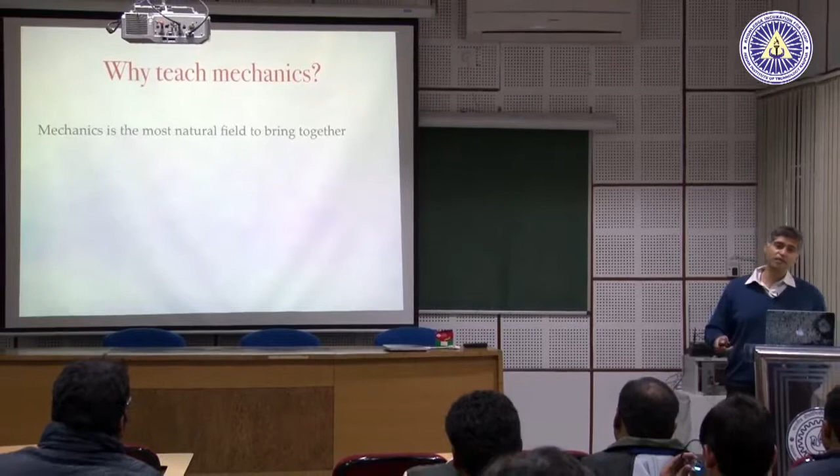So I will broaden the question and I will ask, why teach mechanics? Dynamics is a subset of the broad field of mechanics. So why teach mechanics? It is the most natural field to bring together the 4 or 5 elements that constitute any scientific or technological inquiry. What are the 4 or 5 elements? Mathematical modeling and techniques. What does that mean? That means that you see something happening, it is too complex, so you make a mathematical model

out of it. So the computer scientists amongst you can imagine that you see people wanting to meet or not wanting to meet, or wanting to chat or not wanting to chat, and you abstract it and make a mathematical model which is called Facebook. It is basically a program which is executing commands following an algorithm. It is a mathematical model. How do you solve a mathematical model? By techniques.

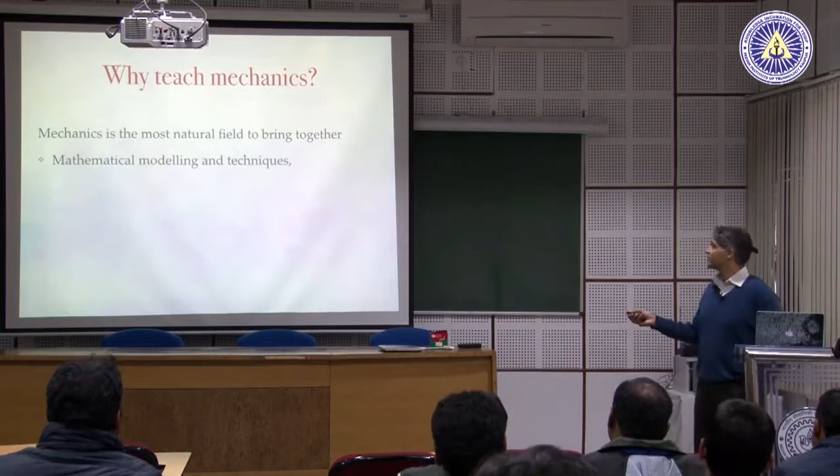It is the first instance of our trying to understand natural laws of physics before electricity. This was it. It can often be demonstrated with simple experiments, and it matches intuition and experience. ये तो होना ही था. If you drop an apple, it has to fall down. That is my experience, right? But it can explain intuition and experience, it can also defy them. So that is why it is most important. This is the first time that you go through these processes together.

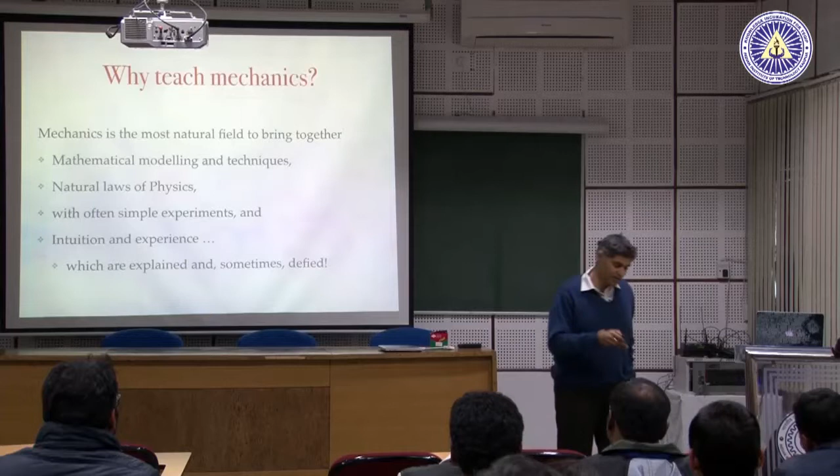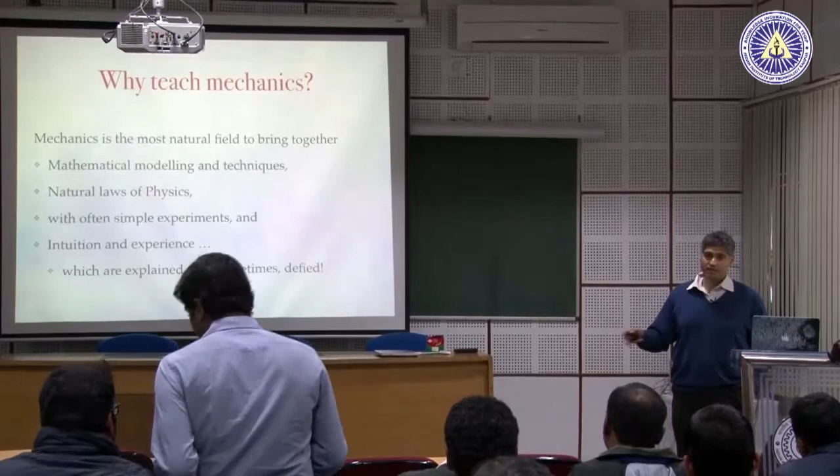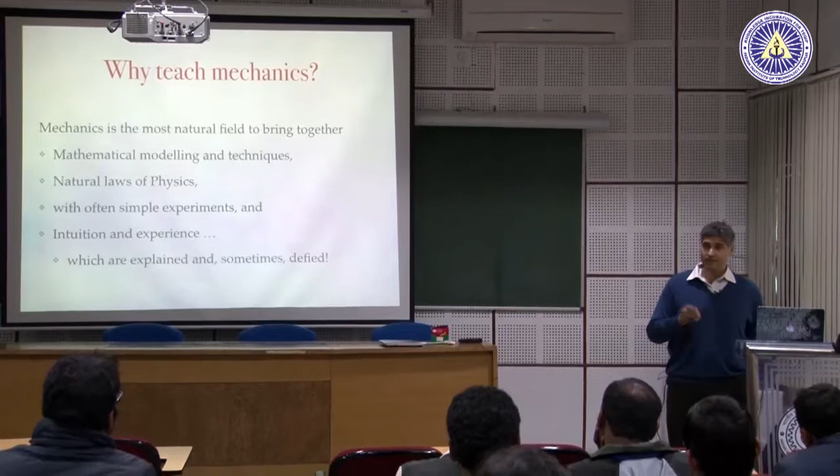So even if you are not going to do mechanical engineering, when I was a student at IIT Kanpur a long time ago, dynamics was compulsory to all branches, not just mechanical engineers. There is a story in which some physics people said, we do not need to teach this, we want to study atoms, and anyway this is easy. So they were told, fine, if it is easy, here is a question paper, please solve it. If you can, we will not make it compulsory. They were unable to solve it. This is a true story. That is why until recently dynamics was compulsory for all possible students.

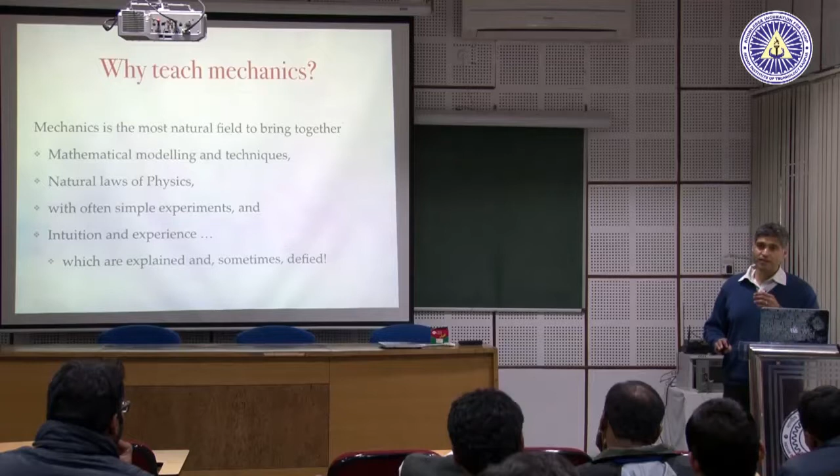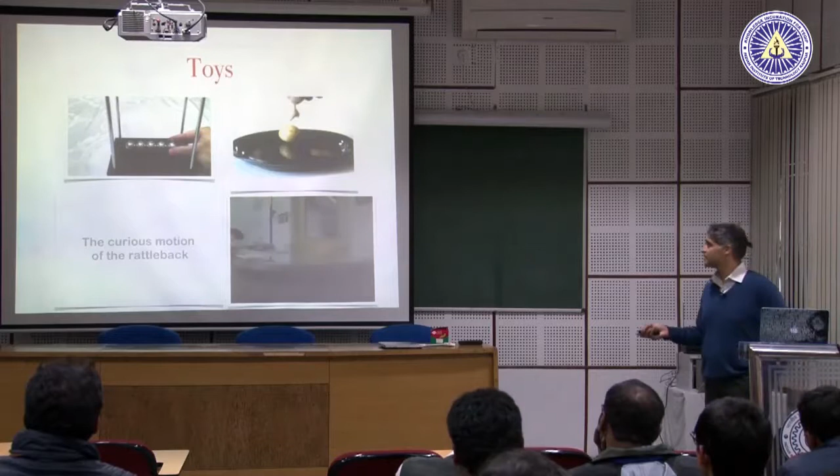So I encourage even those amongst you who are not mechanical engineers to believe me when I say dynamics is the most accessible way to understand the methods of scientific inquiry. Then again, it is fun to teach and it is fun to see. So why is that? I will show you 4 videos which will play simultaneously, and you can look at them for about a minute and decide if they are kind of fun or not.

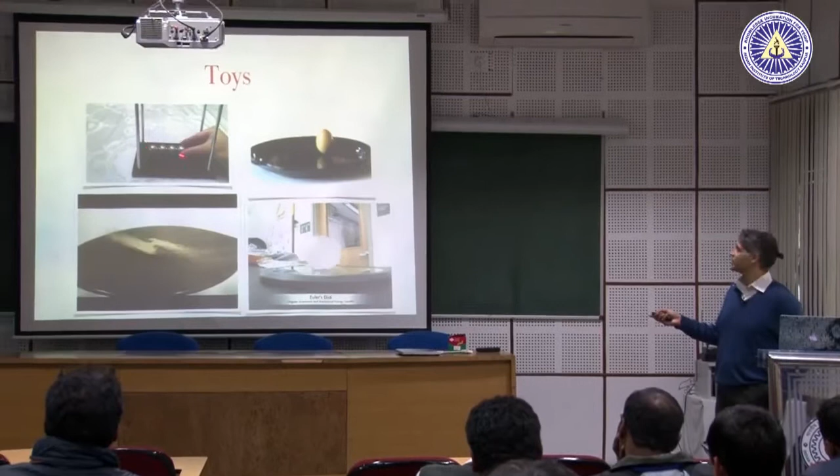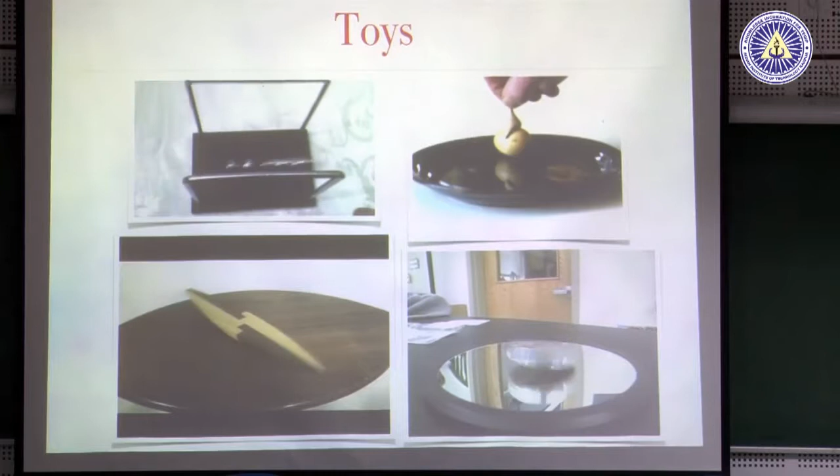So you see a pendulum, but not just one, many of them, and that is interesting. Now this video, let us wait for it to stop, and then this one. What you see is a disc which is falling. You can see it in a kitchen where a plate falls. Now many of you will often have seen something called 1 by 0. What is it called? It is also called a singularity. When things go bad, they go bad through singularities. This disc, what you are seeing right now, is the approach to a singularity.

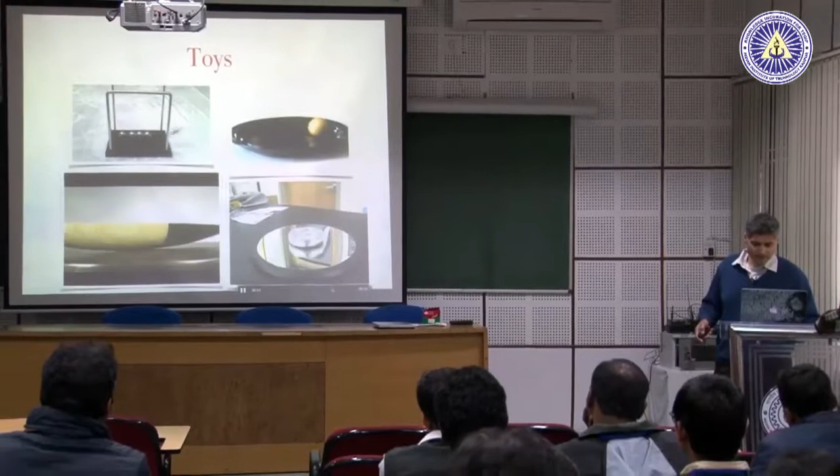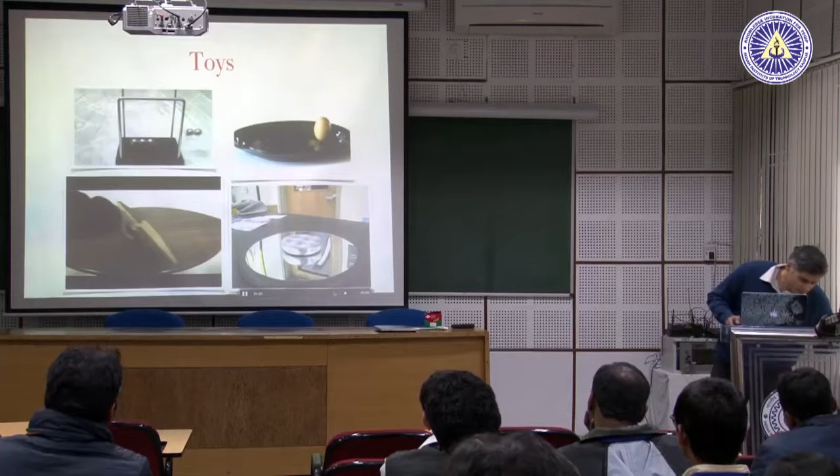And I do not know if this has volume or not. Let us see. Yeah, I think you can. So let me try this again. I am going to make you hear a singularity. Can you hear it? Could you hear it? Let's try again. That one I don't want. I want this one. Can you hear it? I don't know if you can.

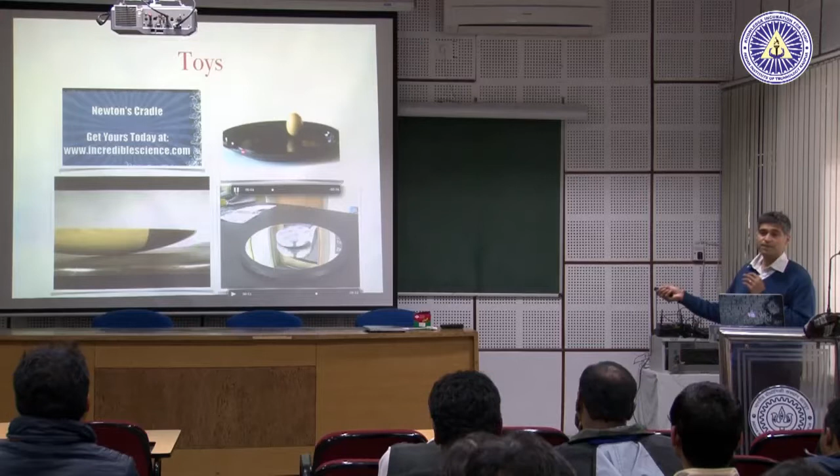So as it falls, if you remain really quiet, maybe you can pick up something. So he spins this egg, which is already spinning the wrong way. I wanted to spin from this point. Okay, so it stands up. Okay, so he's going to start spinning this, and it stands up. Why should that surprise you? Okay, it should surprise you if you have done dynamics.

What is very interesting is that it is spinning about a long axis. Okay, rocket engineers discovered very soon, and I will show you later, that this axis of spin is unstable, that is stable, but the body chose to go from stable to unstable. Okay, so it makes it interesting because it seems to be defying laws of physics.

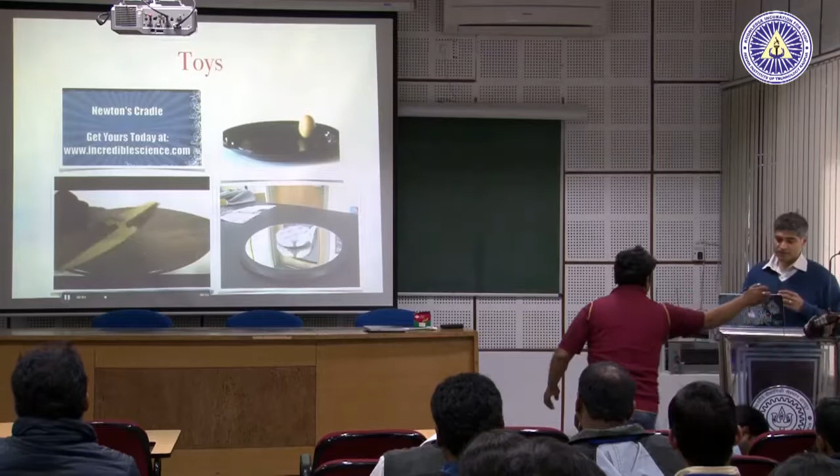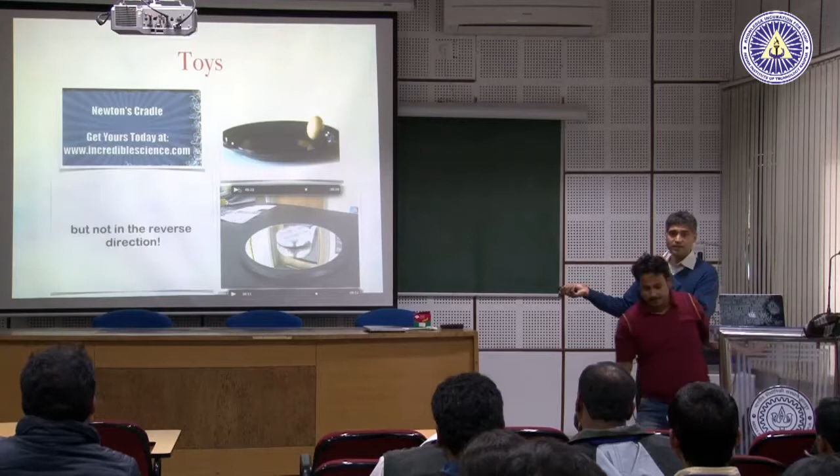Similarly, this one, let's see if we can. So he is going to spin this object. Forget this video. So he is going to spin this. It spins very nicely. There is no problem in this one. Okay. But if you try to spin it the other way, it's not going to spin. In fact, it's going to reverse direction. Okay.

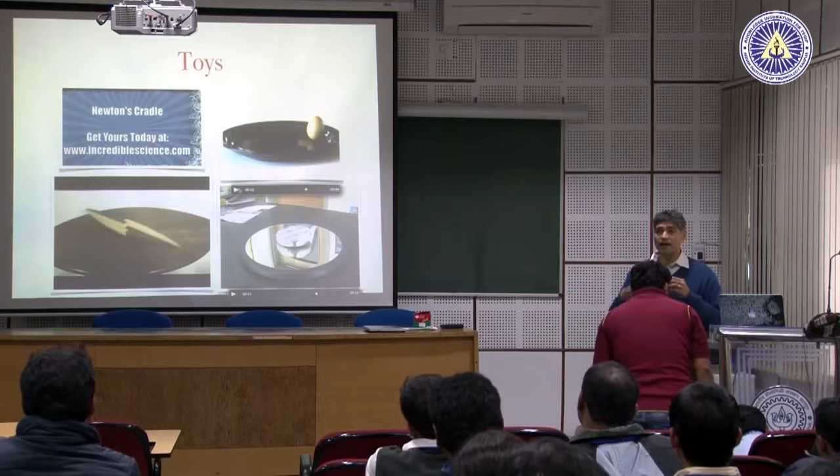And nobody created it. This one is created. I once fell into a river, and when I came out, I had one such stone which behaved like this. So it's actually a very old toy. Okay. So in rivers, the stones sometimes behave in this way. They would spin in one direction but not the other direction.

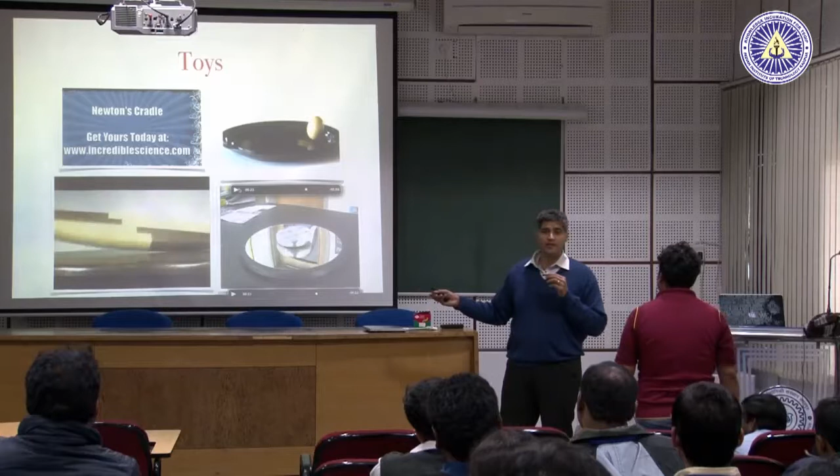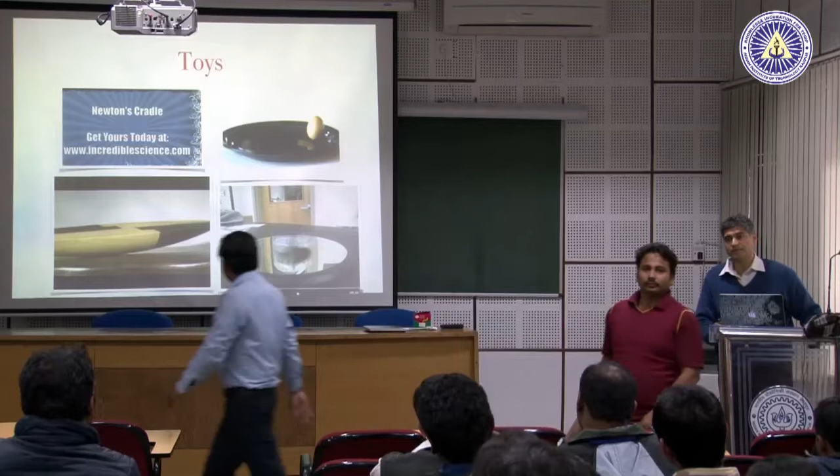Okay, now you hear this sound. Normal sound, nothing very special. It's becoming faster. Okay, what you heard was a mathematical singularity. If you were to actually write down the equations of motion and solve it, you would see something blowing up. So what do you think? What was blowing up? It was spinning very fast.

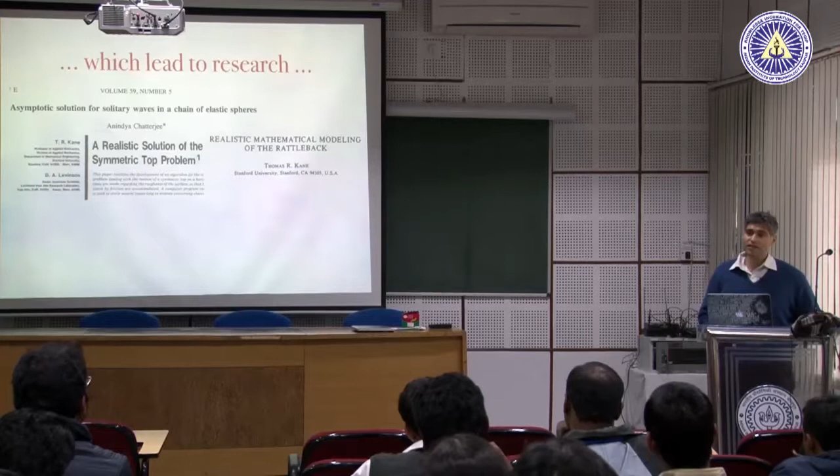I mean, if you look at it this time, if you look at the lines, they are actually going very slowly. It is not spinning very fast, but the contact point is moving exceedingly fast. How fast? It approached infinity. It's faster than light. I just showed you something moving faster than light.

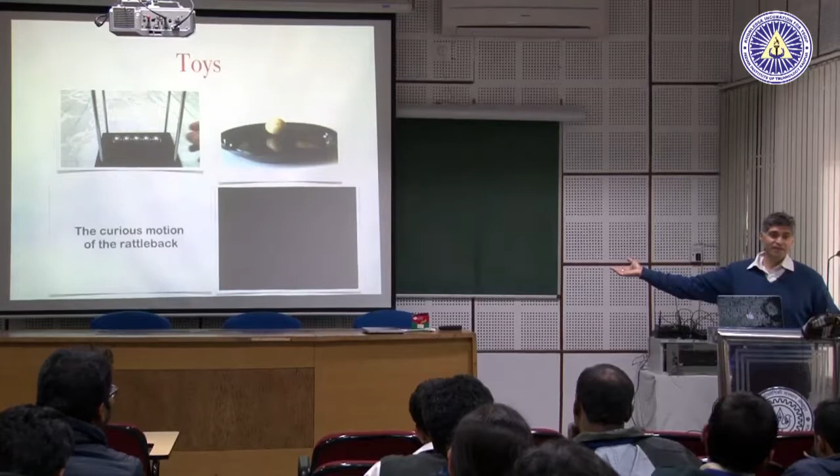You just learned that nothing can move faster than light. But I have done a simple tabletop dynamics experiment and made you hear something moving faster than light. I will let you figure out why Einstein is right and this is right. I will leave it for you. Okay. So anyway, the point is, all of these questions look very simple. You can buy them in toy shops. You will see them on the tables of bosses, and they all lead, so we can get rid of the sound, they lead to research. So here are 3 papers.

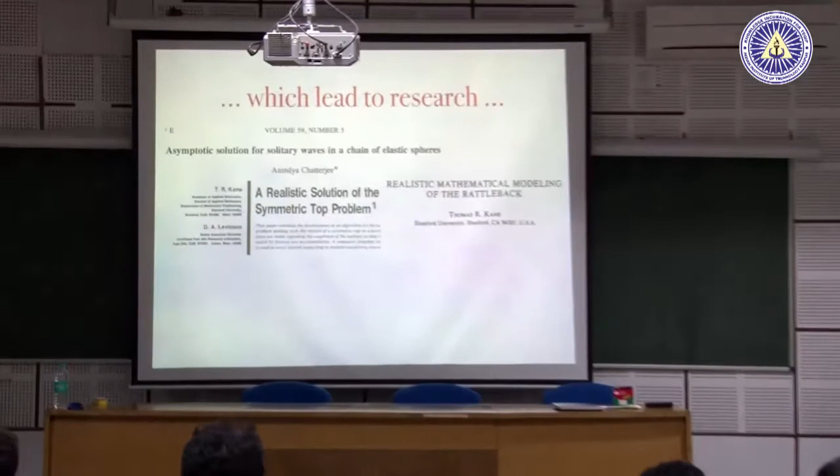You saw this, the thing which spins in one direction but not the other. Paper by Kane from Stanford University. The egg or the ellipsoid which stood up. Paper again by Kane from Stanford. Pendulum, the many pendula which were hitting each other. Paper by Anindya Chatterjee, who will talk to some of us tomorrow. Okay, and they all got the dynamics right, and here is someone who didn't.

That's a paper on the Euler disk with wrong dynamics, but published in, I will let you guess, published in Nature, and it's wrong. Okay, I mean, it's demonstrably wrong, but published there, wrong dynamics. So, you can get dynamics right and get published, you can get dynamics wrong and get published, it's win-win.

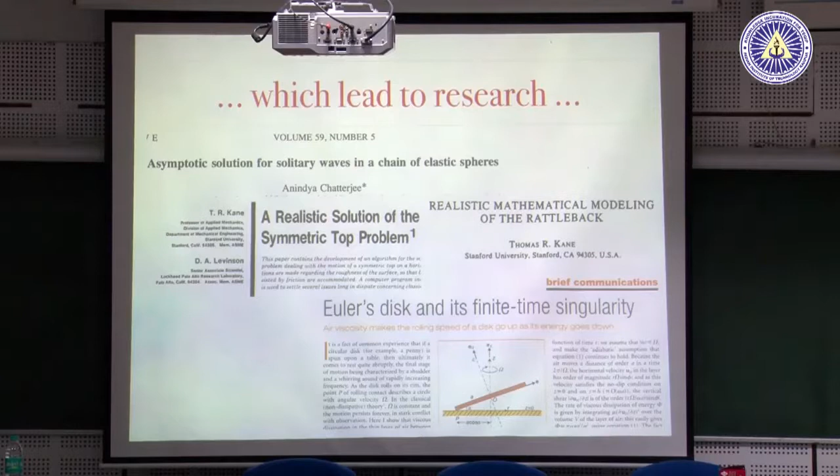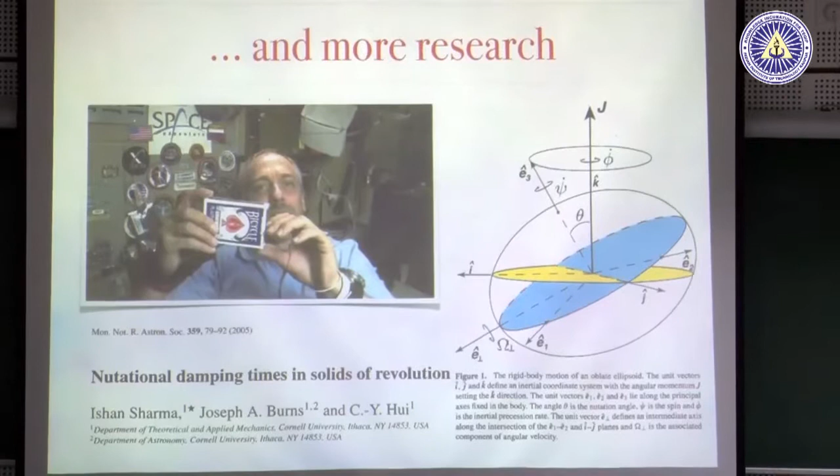So, out of 3 axes, 1 is smallest, 1 is largest, the middle one is always unstable, and this is very important. Well, for me it was important, it got me my first publication. Okay, just this idea. It is also useful. It is useful because it is used in cars. Okay, let us see if this video is running a little slowly.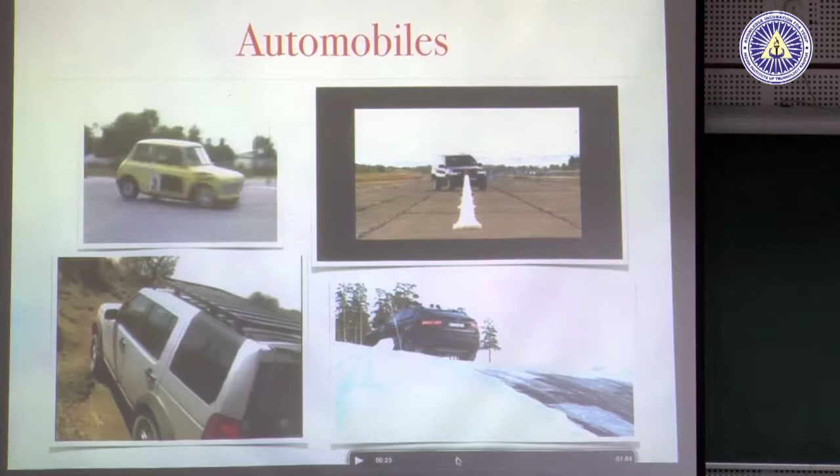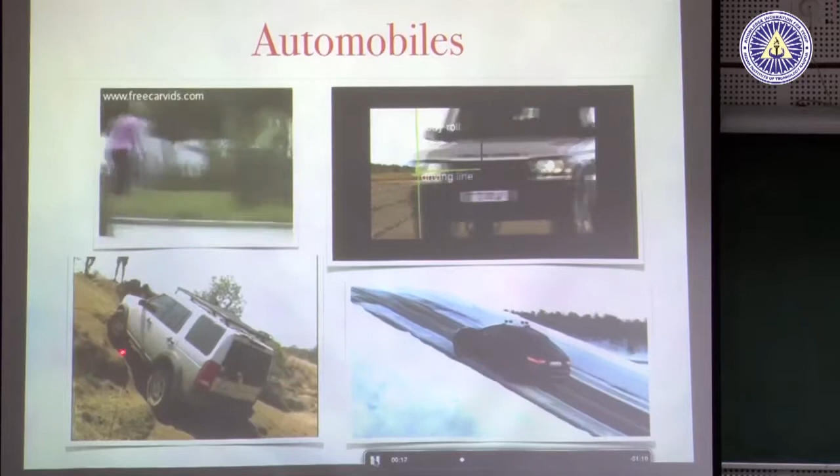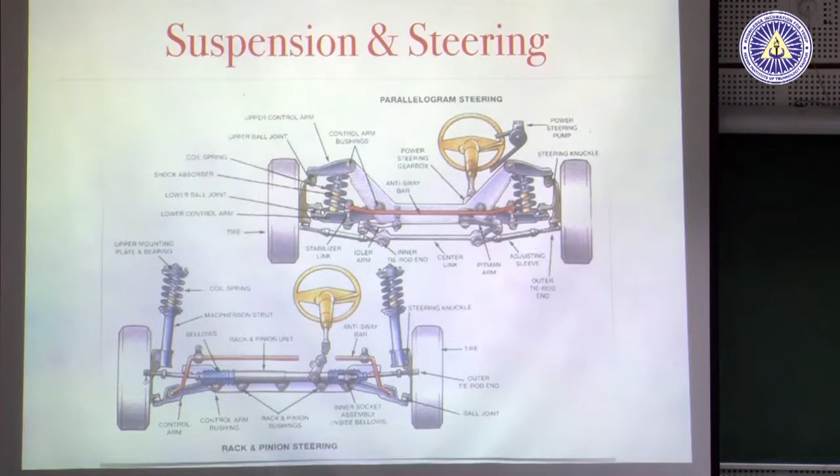So, what you see are cars doing very complicated motions. This car is doing complicated motion, this car is trying to not slip down, this is trying to climb a hill. This is the test done on automobiles. Cars are very complicated machinery. That is a typical diagram of steering and suspension mechanism. How will I solve it? I will show you towards the end.

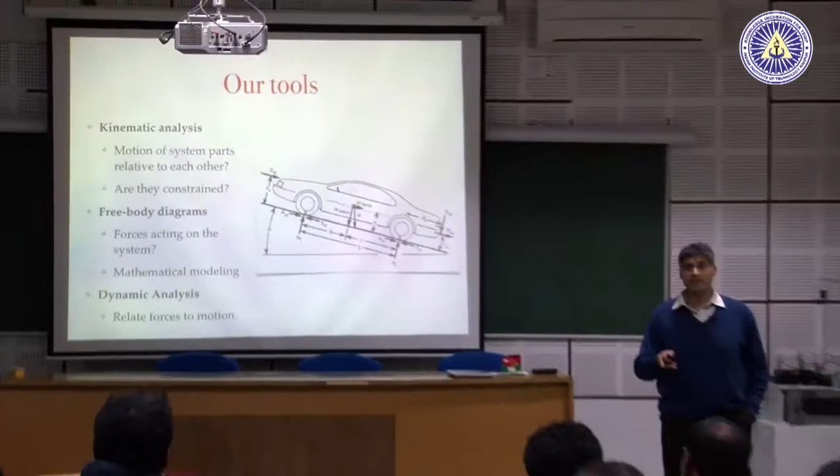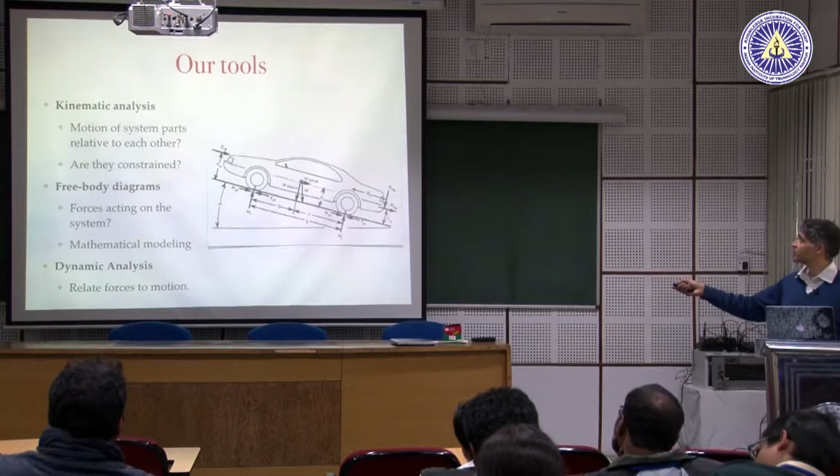Many of these questions can be answered by second year undergraduate dynamics courses. All those papers I showed you were based on second year dynamics, not more. Okay. So, what are our tools? We do kinematics, how objects relate to objects geometrically. We draw free body diagrams to isolate the forces acting on the object. We do dynamics to relate forces to motion. This is where laws of physics come in.

You can experience a force, you can't see an electric current. Okay. That is why it is accessible. If I tell you that a capacitance can store energy, you can't imagine it, but you can imagine a spring storing energy. That is why it is accessible.

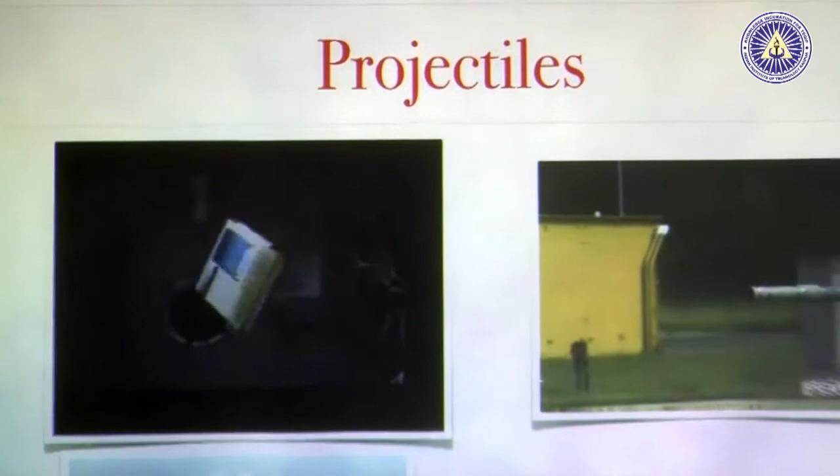Projectiles. So that is a projectile, that is a tank missile. It is rotating about its longest axis. The longest axis in the presence of air is unstable. So why do you think it is going straight? Why is it not going unstable?

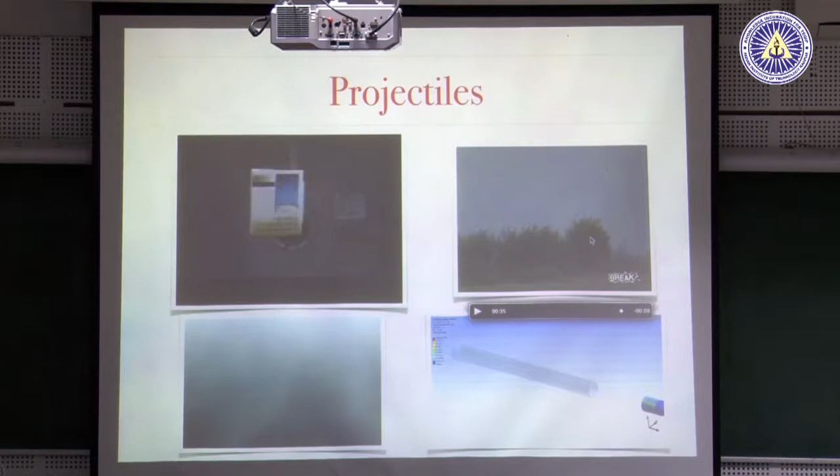Any guesses? The answer is in the video. If you look at the video closely, you will see it is doing something. Take a guess, you can't be wrong. It is also rotating, that is called rifling. Okay. And this lower video, well, we skipped it.

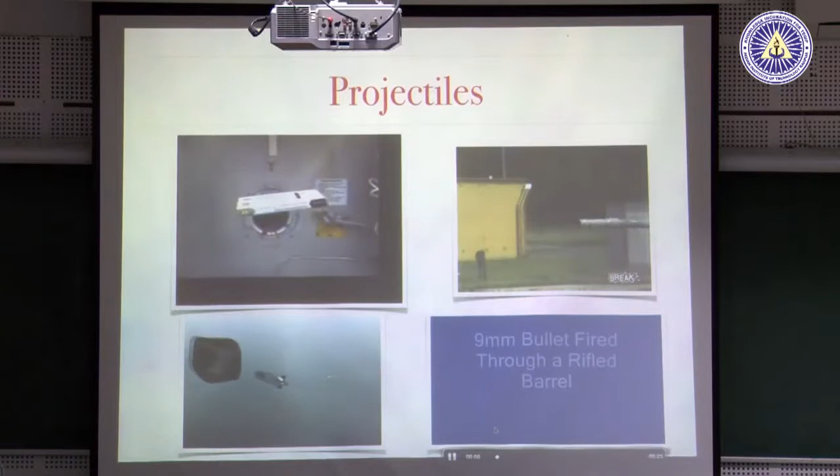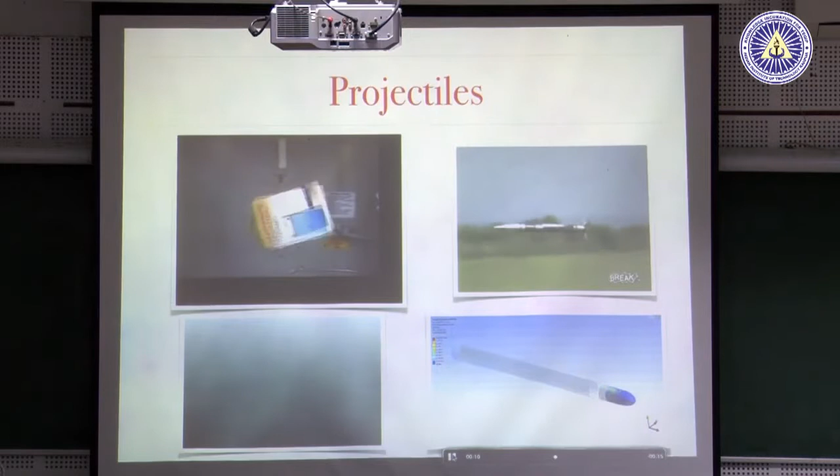So anyway, the point of these videos was just to show you that all of these things are accessible. You do not need advanced dynamics for it, you do not need graduate education for it. We can all understand it based on second year dynamics principles. So that is what the rifling does, it rotates the projectile, it makes it stable about the longest axis.

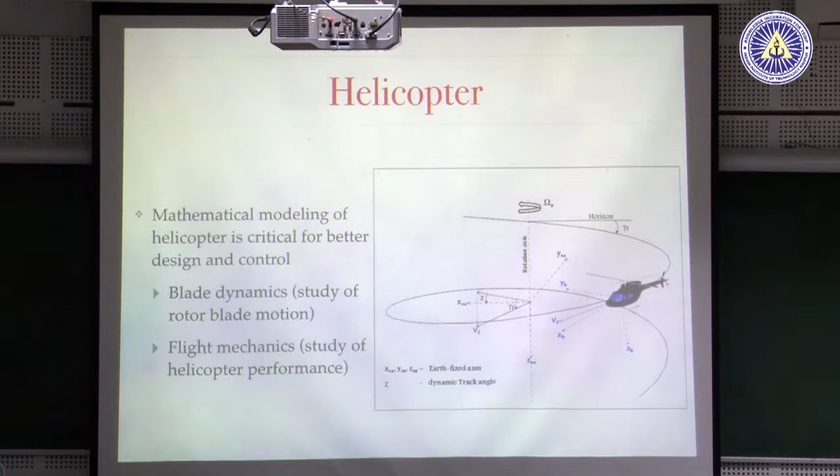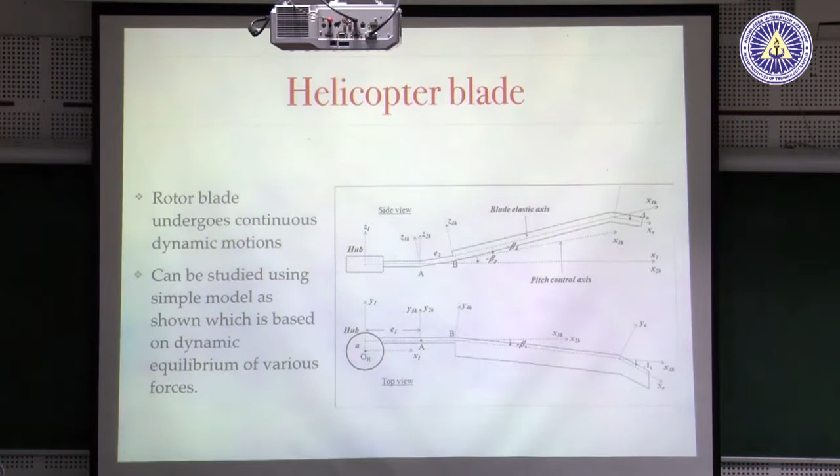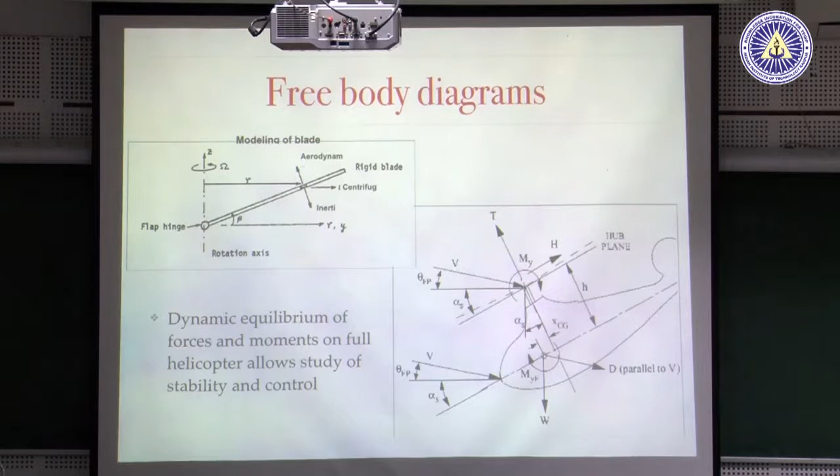Helicopters. So in IIT Kanpur we have the international expert on helicopters, and I forgot to get you a picture of the book he wrote, but inside the book I was very happy to see everything is based on second year undergraduate dynamics. Here are some pictures taken from the book where he is modeling the helicopter blade as interconnected rigid bodies, drawing free body diagrams like these, free body diagram of the helicopter. Not some 7th year of PhD course, 2nd year undergraduate dynamics.

Let me come to something which I know a little bit more about. Dynamics helps explain observations. What observations? See, here is an observation. These dots are something called asteroids. Do you know what asteroids are? So let me show you a picture of an asteroid. That is an asteroid. That is a real picture, and it is very odd shaped, it rotates.

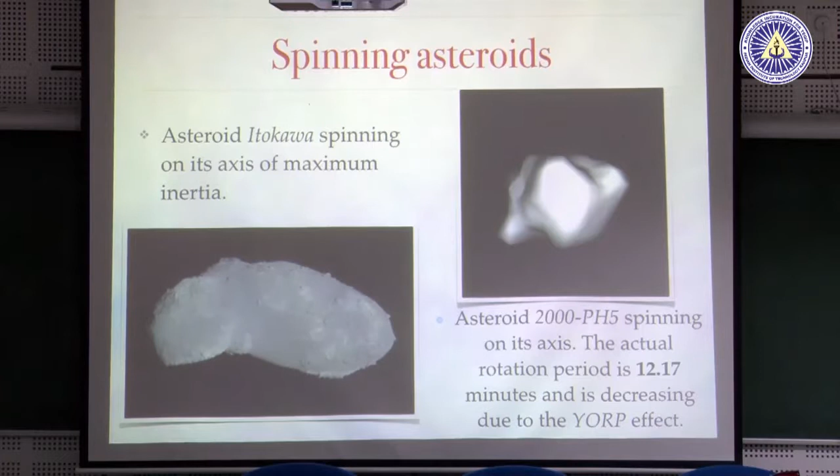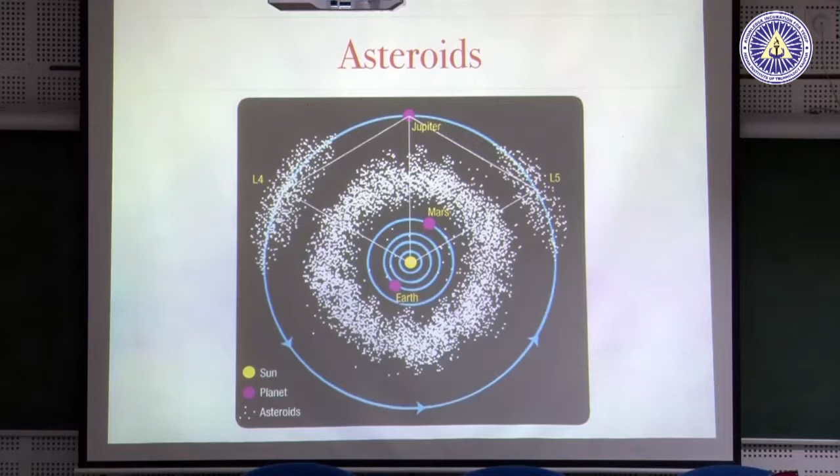So there are many such asteroids, and here is the sun, there is Jupiter, and what you find is most of the asteroids are between Mars and Jupiter in this belt, but there are two groups which are here and here. Now, why are they there? Why is nothing here? You are seeing something and it just puzzles you. What do I need to explain this? You need to do a course in dynamics and then you will know it. Okay. So let me show you why.

There are 5 points. You can imagine some point being equilibrium at L1, right? Something is pulling towards Jupiter, something towards the sun, sun is bigger. So this point has to be closer to Jupiter. Similarly, there could be one point here and one point there, but there are actually points over here and there, L4, L5. It is hard to imagine equilibrium points L4 and L5.

What is even harder is if I ask you the question, out of these 5 points, which ones are stable. By stable I mean that if you put something at that point, but make an error and it is slightly elsewhere, it will remain close. So out of these 5 equilibrium points, which ones are stable? You are saying L2 is stable, okay. What else? Take a guess, nobody is wrong here.

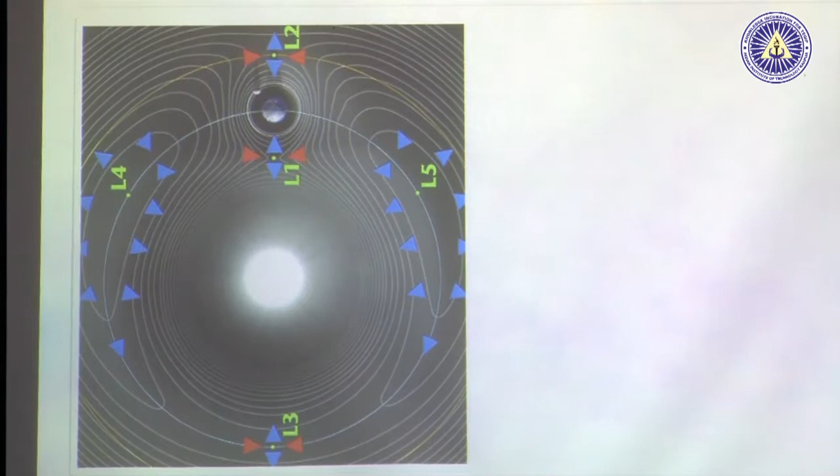Okay, so L2, L3. Well, the answer is, again as I said, it will defy your intuition. L1, L2, L3 are all unstable. L4 and L5 are stable, and because they are stable, nature happens to be there. At L1, L2, L3 you will not find any asteroids, but at L4 and L5 you will. So sometimes it will follow your intuition and sometimes it will not.

There is another interesting paper, this was also published in Nature, and it also was brought about by some observations. So what they did was, here are the asteroids, many asteroids, they can identify families of asteroids.

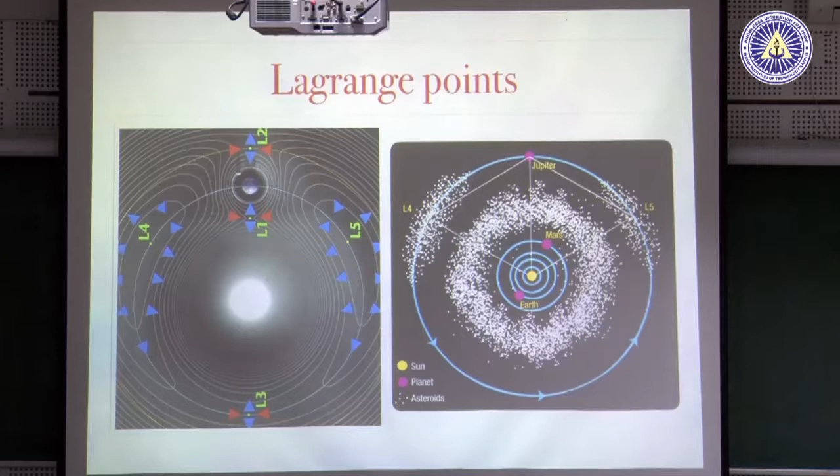Similarly, they can group asteroids together. You belong to the same family because you have the same mineral content or something is similar. Okay. So there is something called a Koronis family.

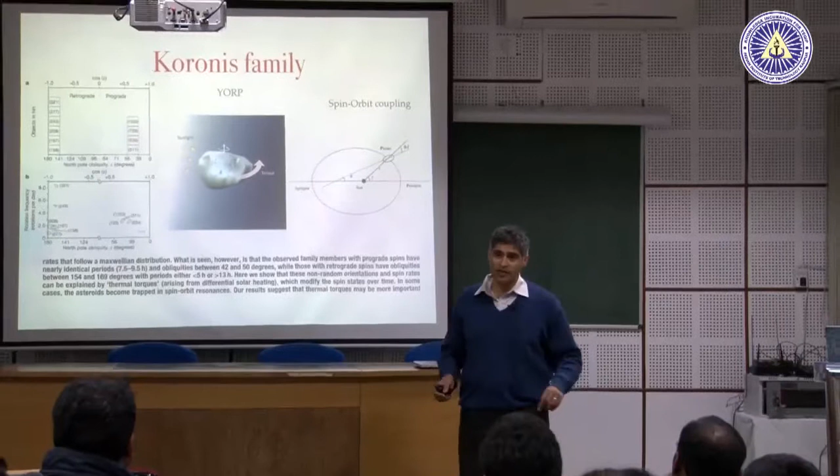What is interesting about the Koronis family is that this is a plot of objects which rotate in a retrograde manner and a prograde manner. What is the difference? Well, let us see. If that is the sun and I am moving around the sun, if I rotate like this, it is prograde, but if I rotate opposite to my orbital motion, it is retrograde. Plus rotation, minus rotation. What they find is that nearly 50% of the objects are retrograde, 50% are prograde. That is automatically interesting. How would that happen?

But you can say, dekho, 50% chance of getting a girl, 50% chance of getting a boy. So, it is all right.

But more interestingly, these objects are randomly created. So, why are they not tumbling? Why are they rotating nicely about a fixed axis? All the retrograde ones are rotating exactly similarly, and the prograde are rotating exactly similarly. So, you see just two, there is no distribution. So, why is that? And it took them a lot to find the answer. The answer was, if you can read here,

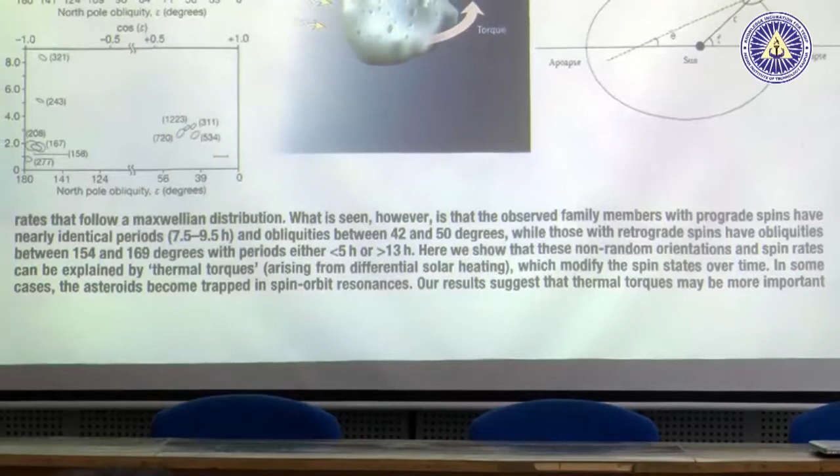thermal torques arising from differential solar heating. That means light pressure can influence dynamics of very large bodies. So let me show you a video which demonstrates this. What you have here are rubber bands tied to a disc, and I am going to heat only some of those rubber bands. So, this is heating these rubber bands, but not those. When you heat something, it will contract, and differential heating can cause rotation, and there it rotates.

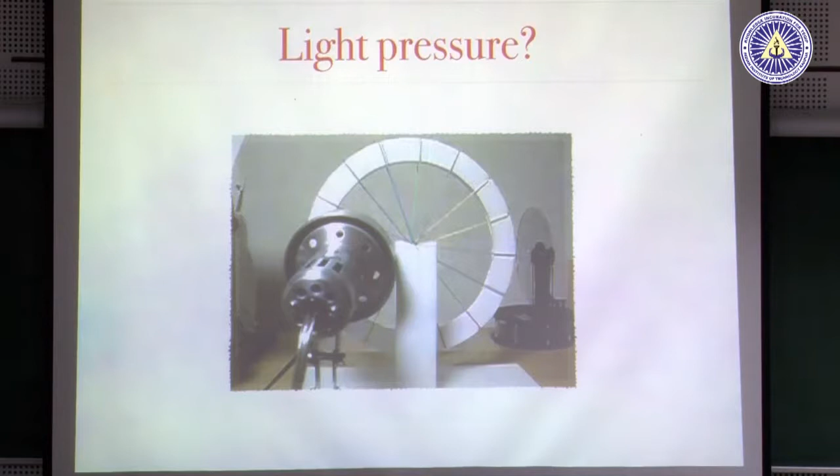This also falls under the simple experiment whose ideas helped to understand why that was happening, something which you will never see in your lives. They are so small, they are pixels in a telescope. That is the breadth of dynamics. So, where am I? Done this, and let me end with saying that dynamics can help explain really complex systems.

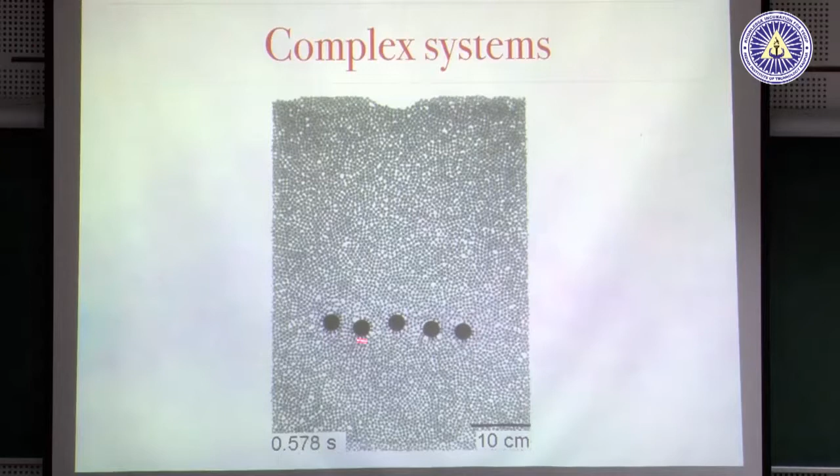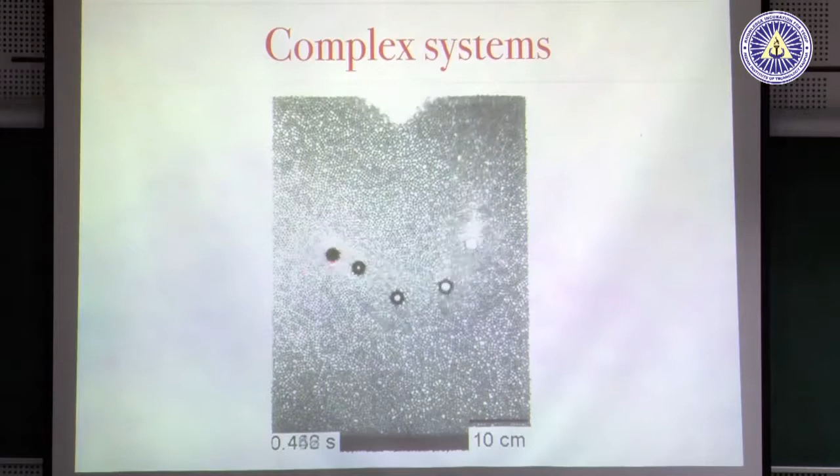So, let me just show you this video. You will see some grains and 5 balls fell, and interestingly they did not fall in a line, but they will end up in a line. This is soil. All together, look, they are adjusting, they are trying to get in a line, but now they have different diameters, large, small. Oh, how interesting, they are again in a line. Different densities, heavy, light, lighter, lightest, again in a line. It can all be explained by second year undergraduate dynamics.

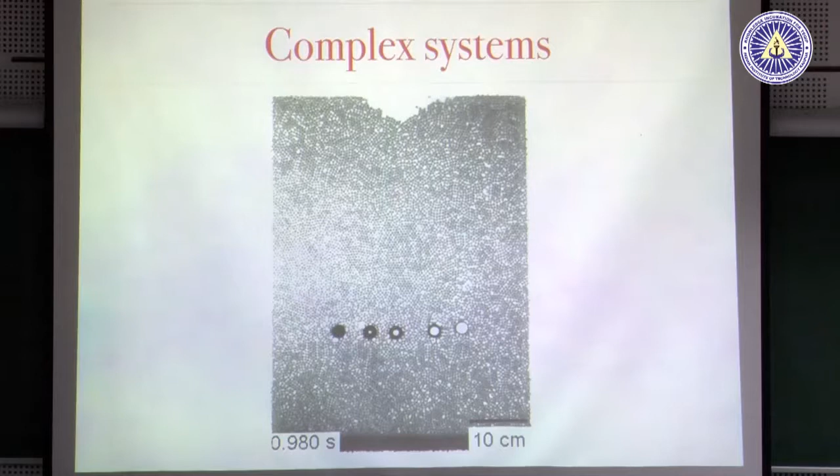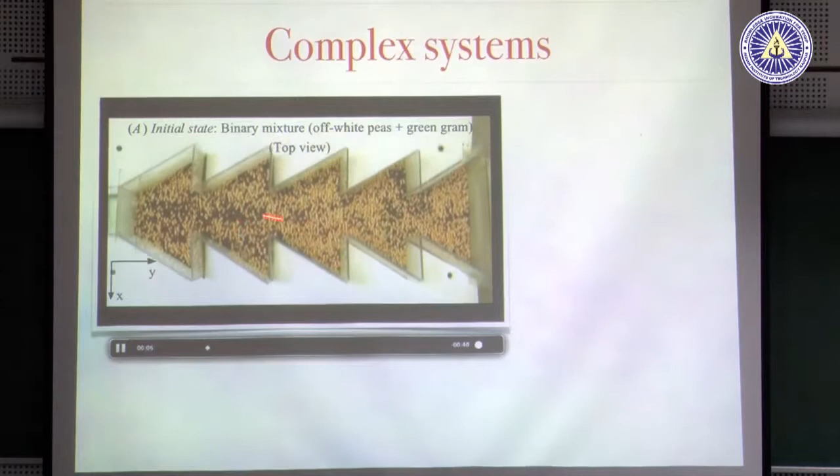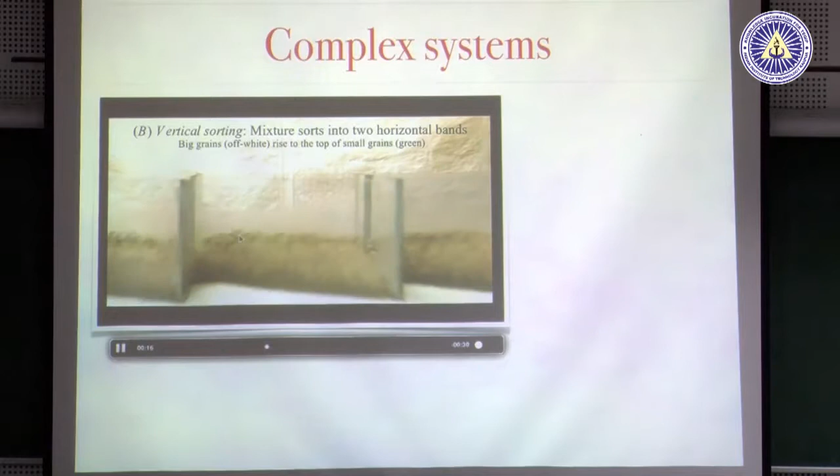Here is an experiment from my lab. So, I have a mixture of grains. You are looking into the table, so gravity is into the table. I am just shaking the grains. There are 2 grains, white is large, green is small.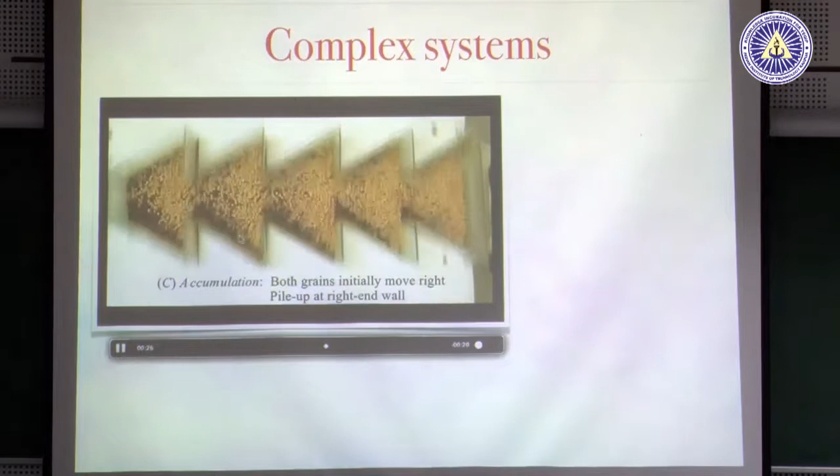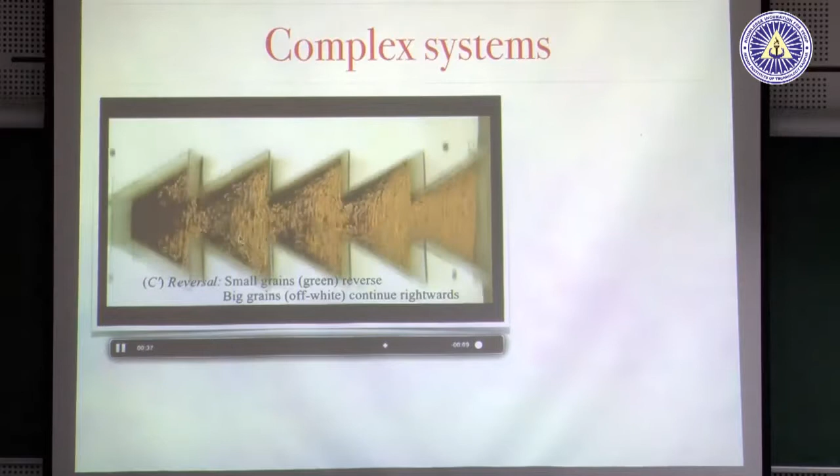Oh, they are separating. They are separating even more. In fact, they separate completely. Number of grains is about 10,000. How does it work? How will you find the answer? I showed you an example where I separate 2 grains, white and green. I have got 3 grains now, sarson, moong, matar, a mixture, separation of all 3. So, I can separate 3 grains.

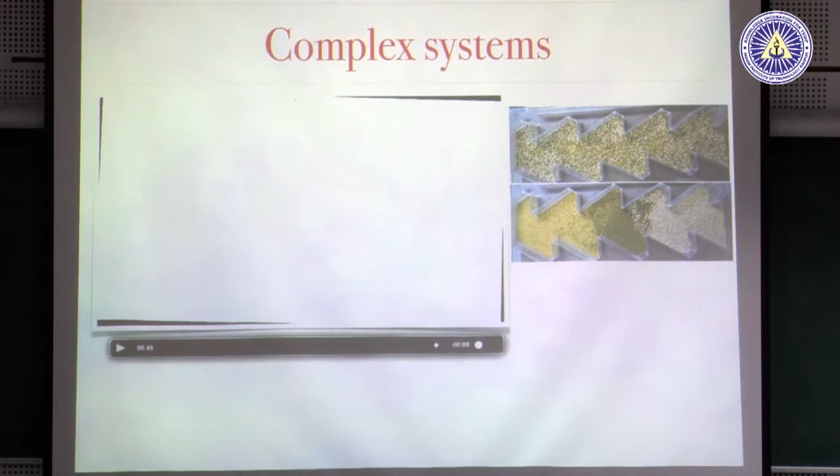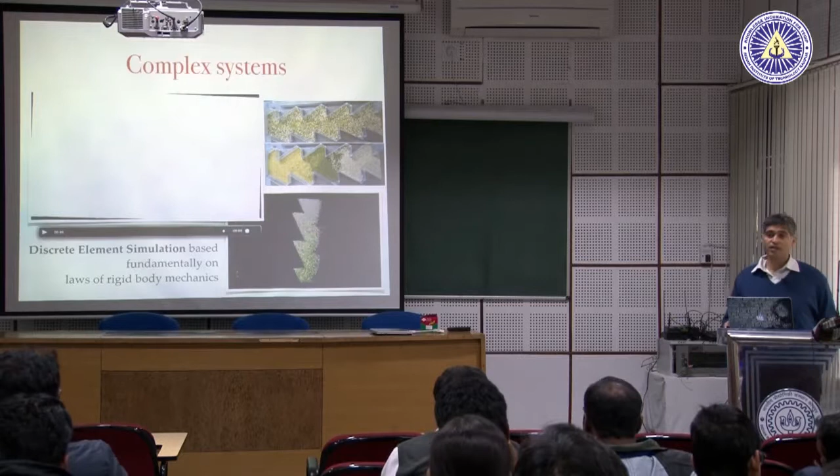Experiment to kar liya. Suppose I am an entrepreneur and I want to sell it to somebody, I have to explain how it works, so I can improve it, make a better machine. So, you can't write down equations by hand anymore, you have to create a computer program, and computer scientists should get interested in this. You have to solve equations of dynamics for millions of particles. For each particle you need 6 equations. If I have 1,00,000 particles, you need 6,00,000 equations. How fast a computer can you build to solve 6,00,000 equations simultaneously while I still remain alive?

So, you can't do it on one computer, you need 7-8 computers, but they must work in parallel. I need parallel programming. That code my student created using parallel programming, but using second year undergraduate dynamics. I am not joking, nothing more than that, and that is a simulation. How good is the simulation? Experiments, simulations. Why did I do a simulation? Once I have a simulation, I can look inside and figure out why things are happening. How complex was the problem? It took me 5 years to solve it. But the foundation was second year undergraduate dynamics, coupled this time with a lot of computer science.

So, thank you. Let me say that change is inevitable. We all understand that, right? And what is dynamics? It is about the rates of change. So, dynamics is inevitable. Thank you.